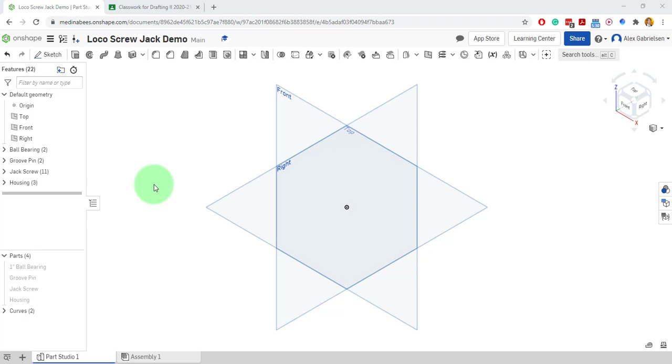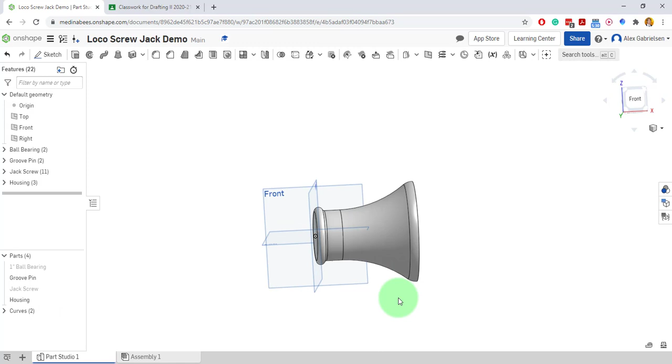Alright, so hopefully you guys are able to complete the ball bearing drawing from an earlier video, the groove pin drawing from an earlier video, and the jack screw,

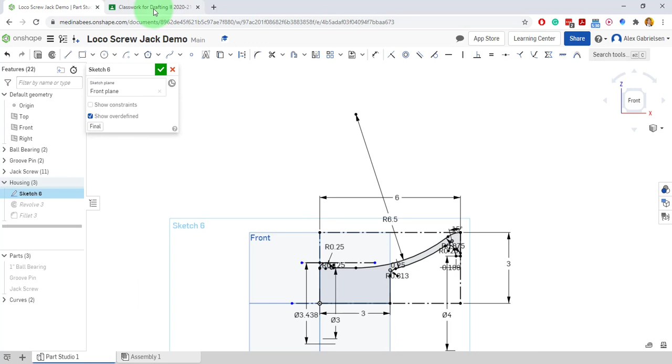and the housing. In this video we are going to continue on with the housing by drawing the handle on the top. So I'm going to go to the steps for the housing, double click the sketch, turn off that groove pin, and view normal to my sketch plane. Now let's take a look at the actual drawing itself.

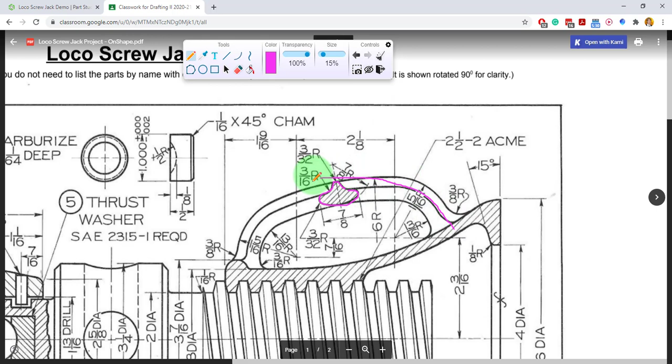In order to draw the handle in 3D, I'm going to have to sweep the profile, or this revolved section, from one side of the handle to the other. This profile needs to follow a path, and the path I want it to follow is the top edge of the handle itself.

I'm not going to worry about the fillets. Those are something that can be done after it's in 3D. I'm not going to worry about this or this either—those are ridges formed by parts of the handle itself. So my first goal is to just get that top ridge, which consists of 3 arcs.

So I'm going to locate those arcs, or the sizes of them. The first one is a 6-inch radius. Then we have a 1 5/16 radius located at this position here, and I'm just going to extend that a little bit. So there is one, my 6-inch is another.

And I have a 1 5/16 on the other side, located by this center point here. My 6-inch radius arc is tangent to the two 1 5/16 radius arcs. So in order to get the 6-inch one, I have to have the 1 5/16 arcs drawn first.

So let's get our framework. Our framework is the center lines, so I can locate the center points for the 2 arcs I need first.

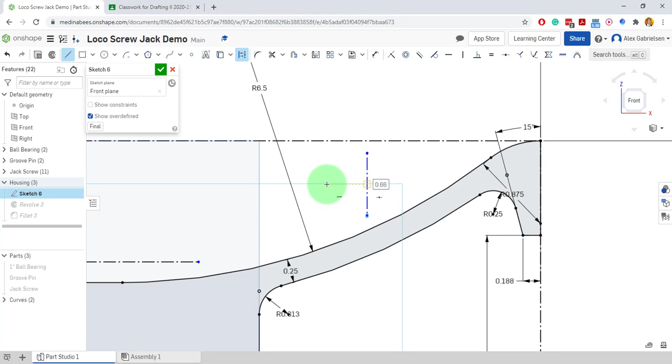It's okay to have it yellow and in line with the center point of this. We'll just have it cross right through the center, and there it is. I'll click the end to stop that. Then we're going to have another one over here. I don't want it to be lined up with anything—I want it free to be constrained later. So I'm making sure I'm not lining up with anything, nothing's yellow and locking me into place.

Okay, so this one shows me that it wants to be 90 degrees with that particular line. That's okay, it can be 90 degrees with that. I'll end this by clicking on the endpoint, line it up with the center there. That's fine, and I'll slide it through.

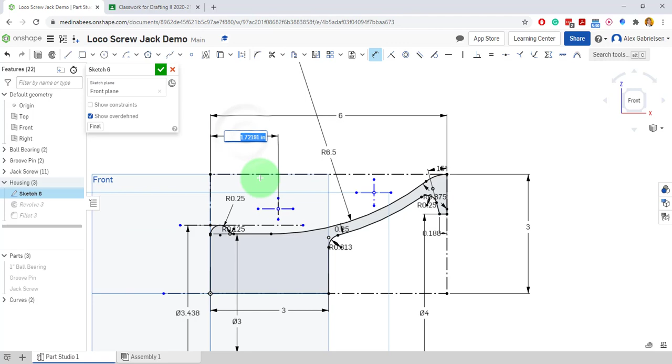So I've got my construction lines. Now I will start to dimension their locations with my dimension tool. So from the top of the housing to this line right here, there's going to be a dimension, and it is 1 9/16. So I'm going to type in 1 9/16. There's the location of it.

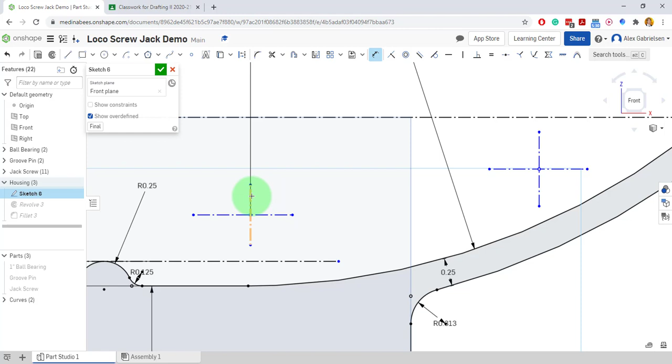The next one is from this vertical line. I'm making sure I'm selecting the line and not just the center point or anything—the line and the line itself. I'll zoom out a little bit and bring this up, and that is supposed to be 2 1/8. So I'm going to type in 2 1/8.

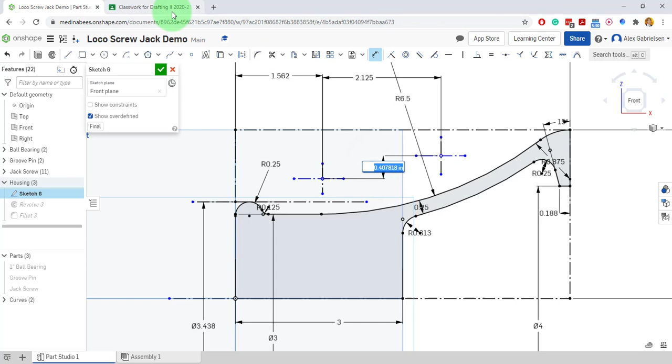And that locates that. Then I need a distance between these two, vertical to vertical distance. And that is supposed to be 7/16. So this one is done. This one is done. I'm going to get my 7/16, so I'll type in 7/16. And that gives me my separation.

And then the last one, I've got the 7/16. The last one is the height of this. So it's 2 3/16. So we'll come back here. We'll do our dimension, and we'll say from here to here is 2 3/16. And it squishes it down.

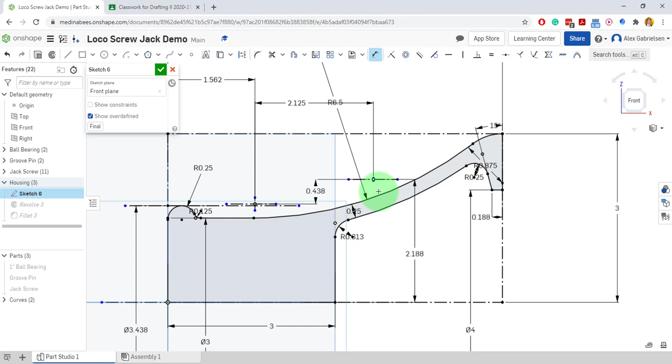And it looks like something weird happened here. We'll just zoom in on it. And my center line, it just got collapsed, it just got crushed. So I'm going to uncheck this dimension, and I'm just going to drag this out and make it a little bit bigger. Go ahead and just drag it out. I'll drag this one out a little bit just for giggles. There it is, so it's easier to see.

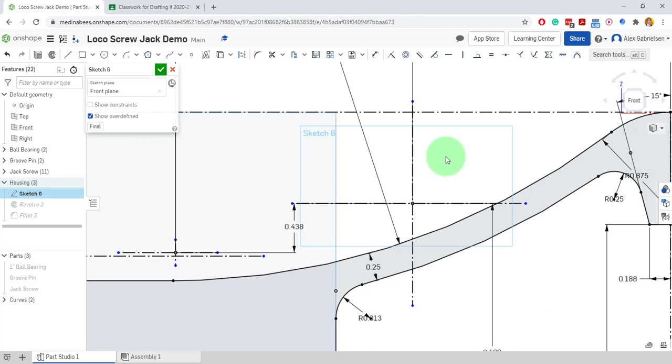I'll do the same thing over here. Just drag this one out. And I'll drag this one out over here. Oops, and that's what I get for dragging and seeing that it's trying to be coincident, trying to be on that line, which it won't be allowed to do. So it's going to yell at me. So I'll just drag it past, and I'll try to make sure that it's not even with anything.

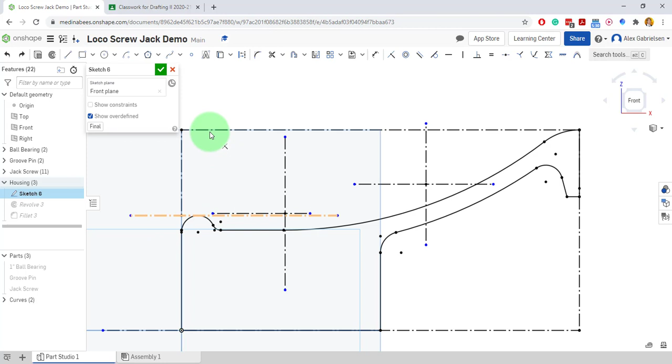Oh, what a pain in the neck! It doesn't like that. Well, we'll just leave it here. I can still see the cross. All right, so those are the center points of my 1 5/16 circles. I've got my measurements down. There's all black. It's all locked in except for the blue endpoints, and that's okay.

So now let's draw some arcs. You know, I'm starting to be a fan of arcs in this program versus the arcs in AutoCAD. The arcs in AutoCAD are kind of a pain. The arcs here in OnShape are kind of handy.

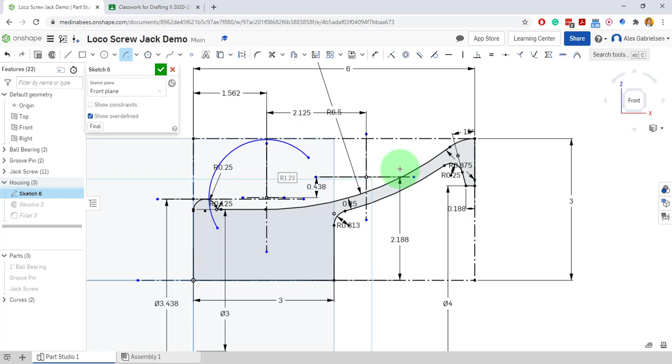So I'm going to choose the center point here where the two lines cross. I want to be on this line and on this line at the same time. There's my center point here. And I am just going to draw way more arc than I need. I'm going to come across and then in, making sure I'm not lined up with anything. Hopefully I'm not lined up with anything. And then I'll come over here and do the same thing, starting maybe inside here, making sure there's nothing. And I'll come across over here. And that looks pretty good.

I'm going to dimension this one, and I'll say that it is 1 5/16. Should be 1 5/16. And I'll make this arc and this arc equal with each other, so they're locked into place.

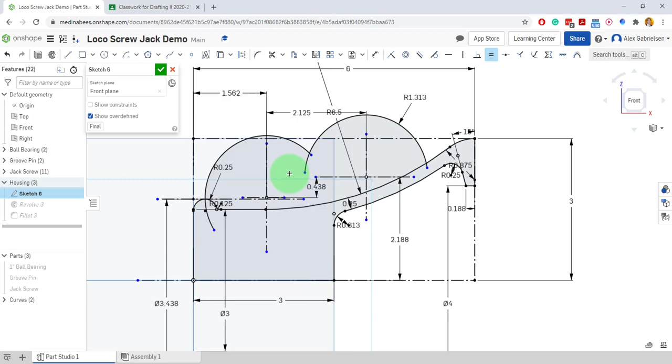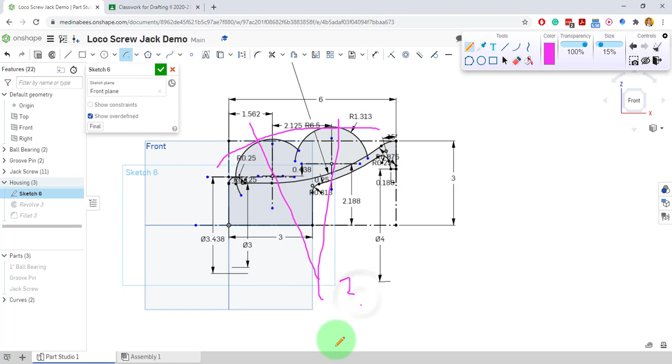Okay, all I have to do now is create my 6-inch arc. I'm going to click the arc command, come down here. I'll just guess, you know, it's going to hit around the top here and the top here, and I'll make kind of like a little triangle. So if I had to guess my arc coming around here of a radius of 6, and I had to guess where the center point would be, I'd guess down here somewhere. So I'm just going to make a guesstimate down here for my center point.

So here I go with my arc. I'll guess right around here somewhere. Make sure I'm not lined up. See that yellow show up? Got to be careful. I can get myself in trouble by constraining it, because if I lock it in, it'll always be in line with that midpoint up there, and I will never be able to move it. I don't want that. I want it to free float out here somewhere. So here, I'll come up, and I'm not going to lock in with anything yellow. I don't want it to line up there. That yellow is dangerous. Come off of that.

Draw myself an arc, make sure I'm not locked, not constraining it at all. Come over here. Now I'll constrain it just by the dimension, and I'll say it needs to be 6. Right now it's almost 7. There it is. Whew, that's crazy, look at that.

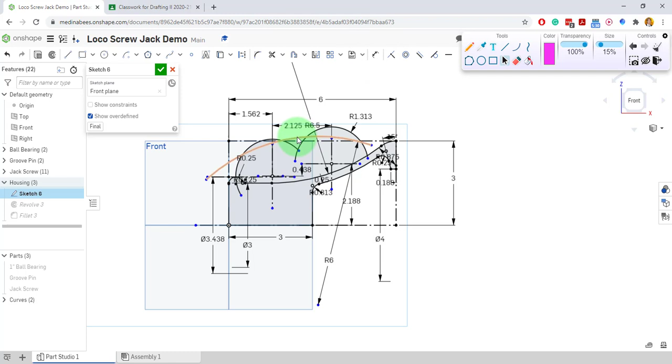So now I'm going to uncheck this, and I'm going to click, and I'm going to drag my center point up a little bit above this, right about there. I can click and drag my center point here if I wanted to, but as long as I'm above it, I can now use my tangent.

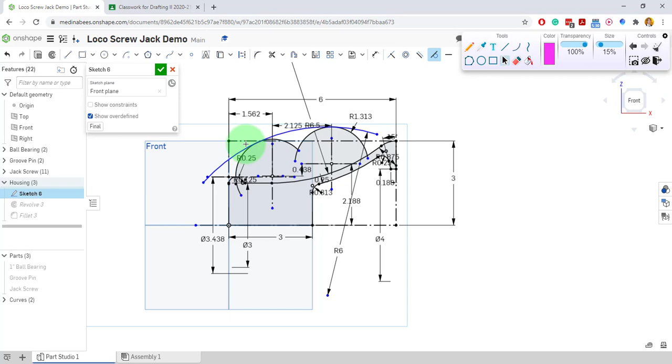I can be tangent or touching this, and even though it looks like it's tangent, I got to make sure. Click here and here, and now it's all black. It's locked into place, and now I can use my scissors to trim this up a little bit because I want a nice smooth path for my sweep.

So I'm going to go through. I can actually drag this back a little bit, drag this back a little bit, whoop, drag this back a little bit, so there's a little less for me to cut. Just drag this because I've got no tool selected at the top. I'm going to leave this, drag it down in here a little bit more, and leave that there. This is important.

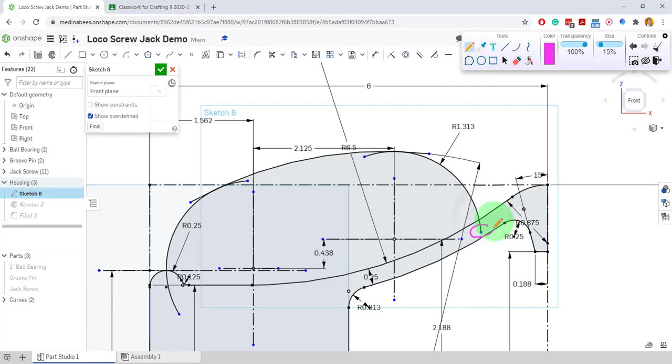I'm leaving this here, and I'm leaving this here, so that when I sweep my profile, it goes down into my object and can be fused with it using Boolean. And then I come down here, it'll go into my object, but not through it. I don't want to do that. So I can sweep and fuse my object, kind of like two droplets of water combining. You're not going to get those apart because they're going to be fused together.

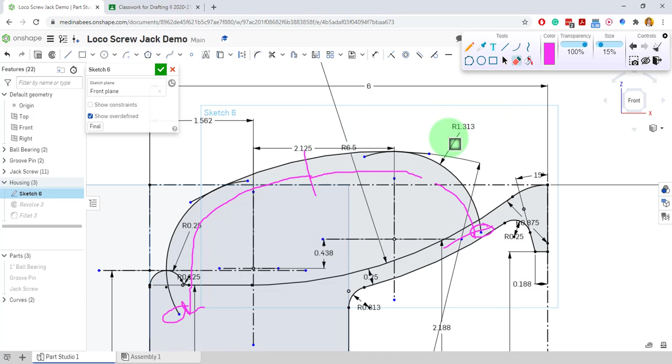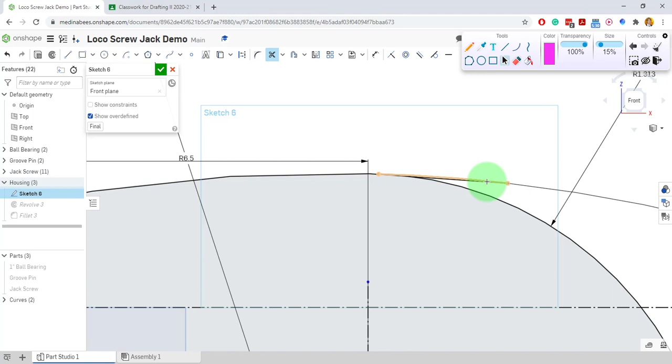So now let's sweep that away, and let's clean it up a little bit more accurately here with the scissors. I'm going to trim this away a little bit, come in, do a little bit more like that, come back, come over here and here, and now I've got a path to sweep. All right, so that is one of the steps.

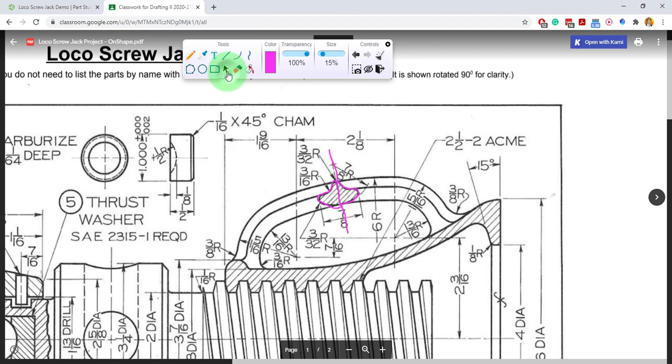Now if I come back over to my drawing and look, you'll notice the profile that I have to make, which is a little bit of a challenge, not too bad, has a center line running through it, and that center line is right in line with the center point of the drawing, or sorry, of the 6-inch radius. I'm going to zoom out a little bit.

So it's the midpoint to the midpoint, and it's lined up normal to the curves. What that means is it's from the middle of this and the middle of this, normal to the curves, looking straight on at it. If I were to bring this down, it would hit the center point of this 6-inch radius. They would be in line with each other, because anytime you have a line or two circles that are concentric, or having the same center point, they'll appear parallel, and if you put a line bisecting them normal to, or at the same midpoints for those arcs, it'll line up and hit that center.

So I'm going to sweep this away. Long story short, I need this line to help guide me. I'm going to put a construction line in there. So let's go back into the drawing.

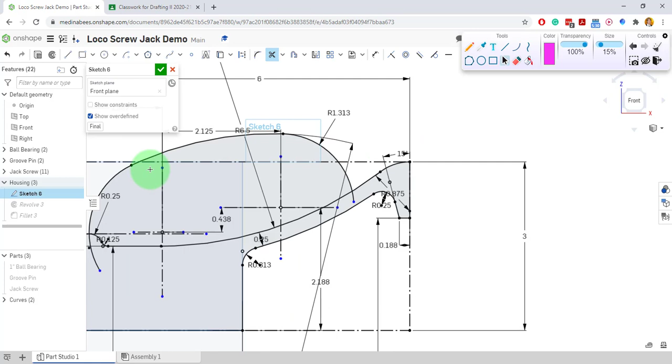And now that it's all cleaned up, no extra lines, I know where my midpoint is, and I can see the center point of my 6-inch radius circle. Here it is. There's my 6-inch radius circle.

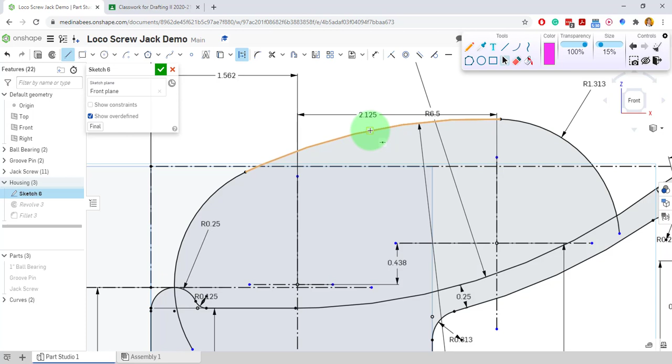There's the center point. And so what I'm going to do is take a line, a construction line, find the midpoint by moving along and looking for a plus, or a box and a line with a dot in the middle — that's the midpoint constraint. So right smack dab in the middle of that arc, I'm going to click, and come down, and make it coincident, or on the same center point. And there it is.

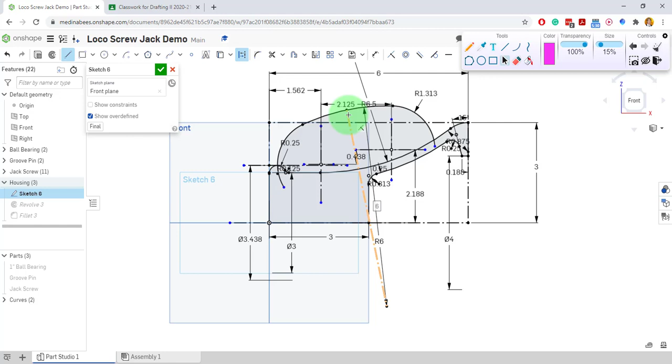And so now that's normal to, or essentially quote unquote 90 degrees with that point of that arc. All right, so my profile curve is going to be drawn on here, but I have to revolve it 90 degrees with the front plane of what I'm drawing on. So I'm going to hit...

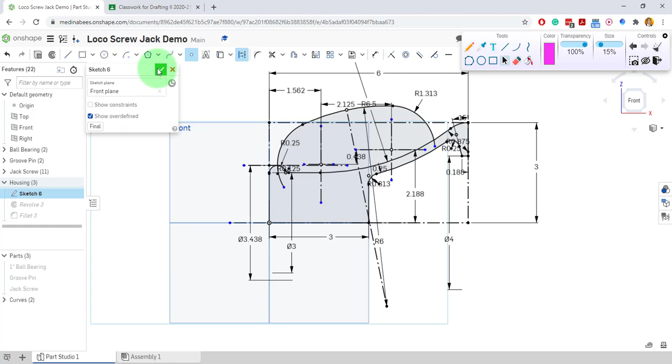I shall do one more thing here just in case — I'll put a point object on the end here. Point objects can be seen pretty much from any view or any one of the construction planes. So I'm just going to stick a point object there just in case I need it. All right, it's not going to hurt anything. I'll click the check mark. There it is, and I will make it visible.

Okay, now what I'm going to do is I want to draw my profile curve on this axis. So I need to make a plane. Ooh, that's a great profile curve. I need to make a plane that is in line with this axis. So let me get rid of that.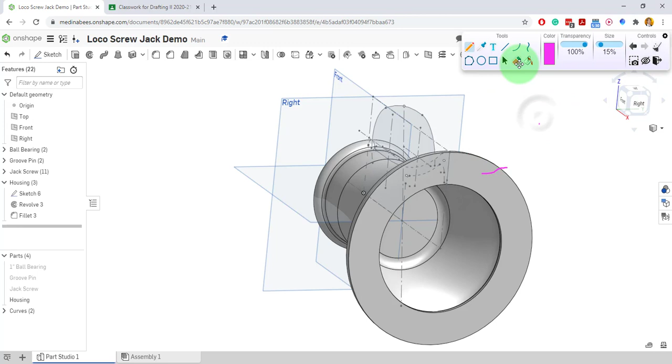I need to make a plane along this line here so I can work on it like a work surface. So my plane is my work surface.

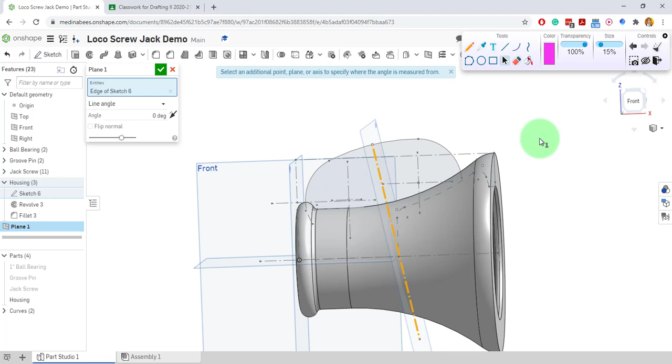I'll come up to plane and select plane point, line angle, point normal, 3-point, mid plane, curve point. Well, I've got a line here, so let's try the one that has the word line in it. Line angle. I'm going to click on this line, and notice already the line kind of is where the plane is, right where I want it to be.

I want it on that spot, so I don't have to change the angle. If I wanted to change the angle, I could there, but I'm not going to. I'm just going to accept that.

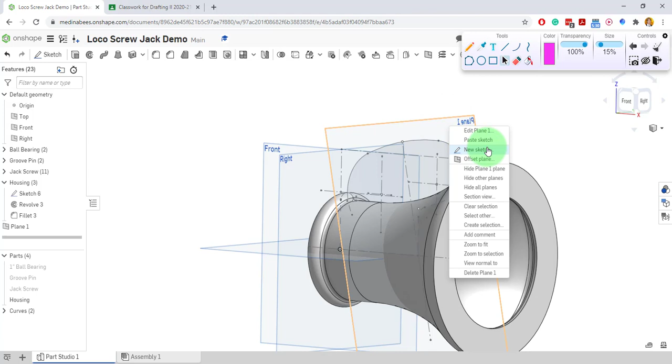So now I'm going to draw my profile on plane 1. I'll right click it and do a new sketch, drawing the new sketch normal to that sketch plane. So I'm looking right in line, and I put that point there, which has like an empty spot. It's not a dark point.

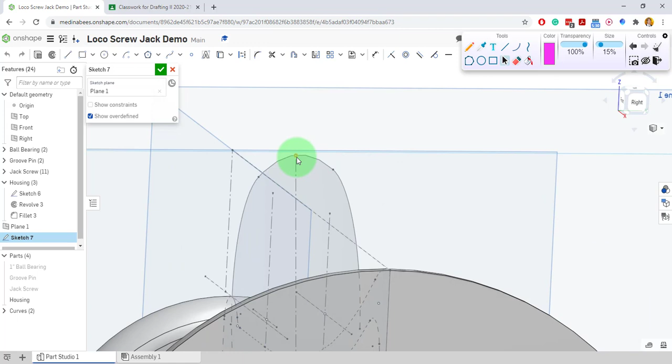I know this is the top of the arc, so actually now I'm kind of glad I put that point object. I can identify it a little bit easier.

Okay, so let me put some boundaries here. Let me draw a line and a construction line, and let's make it even with that. Let's come way out here, ridiculously wide out there, and out here. There it is. And I'll come down, and over, even with this, and I'll just make a rectangle here. Okay, now, way bigger than I need to.

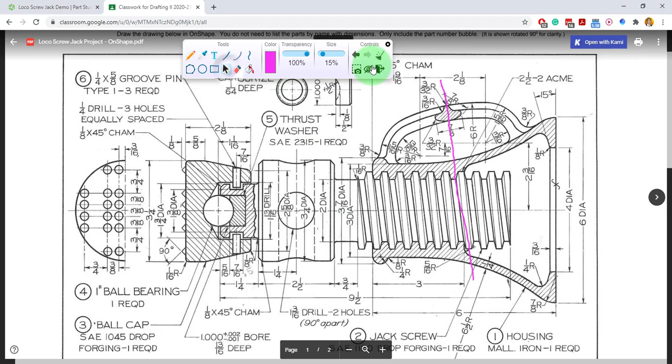Let's check my drawing. I need to make this weird shape, so let's get a closer look at it. Come over to the side here, bring it down.

Okay, so first off, we can't have it be any wider than 7/8. It's going to be 7/8 wide. We can't have it be any taller than whatever this height here is, which is the difference between this radius and this radius, or the difference between 13/16 and 1 5/16, which if we do the math, is a 1/2 inch difference. So it's a 1/2 inch tall, 7/8 wide. I'm going to make my bounds box a 1/2 inch tall, 7/8 wide.

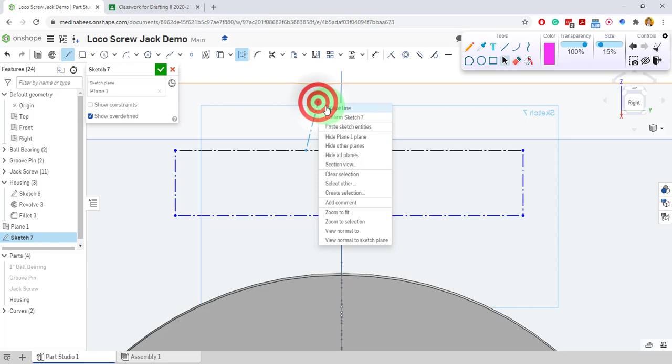So let's take this. Whoops, I got to get out of this command here. Let's right click, escape the line, and click my dimension tool. Let's make this 7/8. Whoa, that's way bigger than 7/8. 7/8 wide, can't be any wider than 7/8. And now I want to make it 1/2 inch tall, so I'll come out here and make it 0.5. So that is where my object is going to fit in.

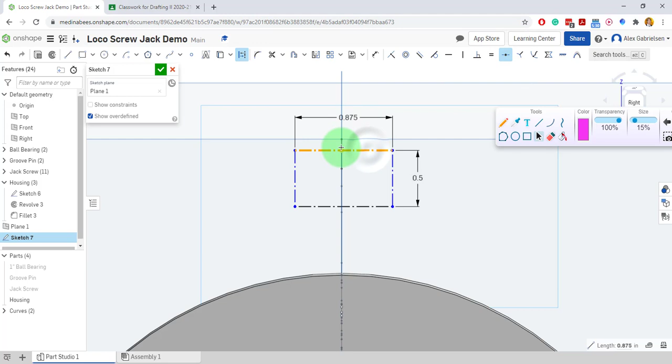Okay, problem is, it looks like this thing's not in the center point. I don't think I made it be the center point of this. I wonder if I can fix that. I wonder if I can say, hey, use the midpoint. Midpoint of this has to be on that dot, and it shifts it over. Now we're good. All right, so it's even on both sides. It's symmetrical, and we can start drawing our profile.

So let's clear this out and take a look. All right, so this has a 7/8 curve, and it touches the bottom, and it's on the middle point. That should be easy enough to do.

Let's do an arc, that the center point lines up with the line that we're on, right? Lines up with the line that we're on. It's in line with all this.

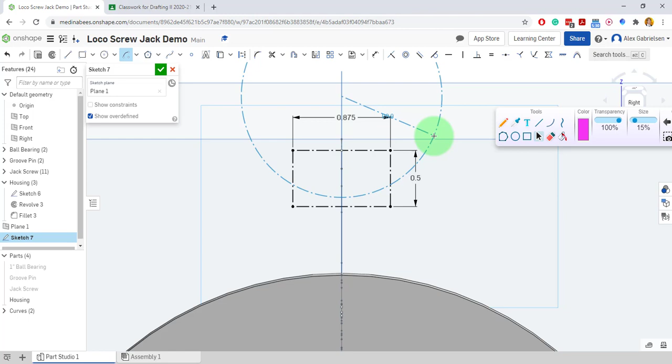Okay, and let's click. And now it comes over here and over here, and it has a radius of 7/8. Not only does it have a radius of 7/8, but it has to be tangent to, or the bottom of it has to be coincident with this point here.

So let's do coincident. It has to go or touch this line there. Whoops. Maybe this point here. Awesome, cool, the center point. Let's undo that. Let's do tangent. We know it has to touch it, so let's go tangent with this line. Cool, all right, and we can take off any tools here.

We can bring this down a little bit, bring this down a little bit if we want. We can even make sure that it's touching those and not outside of that.

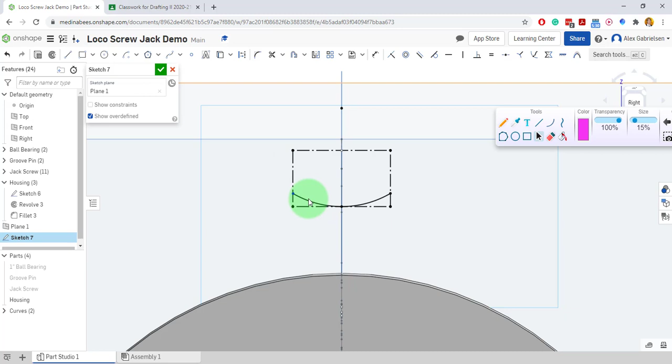Awesome, we've got our 7/8 radius for our weird shape. All right, check, got that bottom one. We know we've got a...

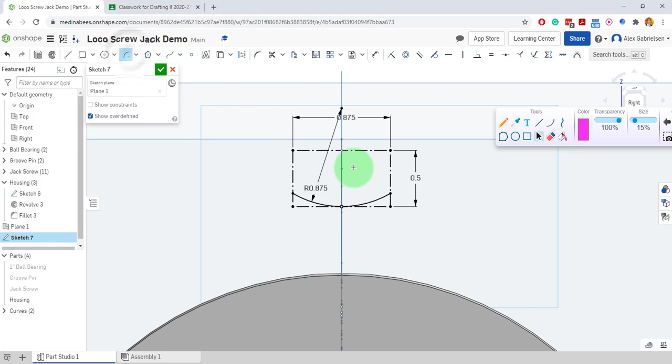3/32 radius arc at the top here. Let's draw that top one. Let's do our boundaries, so let's go to our arc. We know it's got to be on this line here or in line with it. That's fine if it's coincident with this. So our center point's going to be here, and it's going to kind of come down and around.

We know we want it to be tangent with this, and we know we want the size of it to be, I think it was... 3/32. Yep, 3/32.

Awesome, cool. Now check this out. We've got a radius and a radius over here that are also 3/32 and touch the edge and touch the 7/8. So let's put those in.

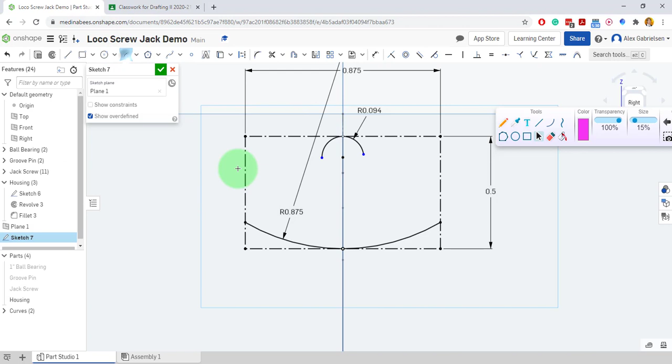All right, we know that we've got an arc that's going to be out here somewhere, and we know it's going to kind of come like this, come around. We know it's going to be tangent to this, we know it's going to be tangent to the bottom, and we know that the size is going to be 3/32 or equal with the top one. There it is, cool. We also know we have the same thing on the other side.

So I think we could probably just mirror this over. Select a mirror line, this vertical line, and the entity is going to be this one. Same thing on the other side. Awesome, okay, uncheck that. Now what else do we have to do?

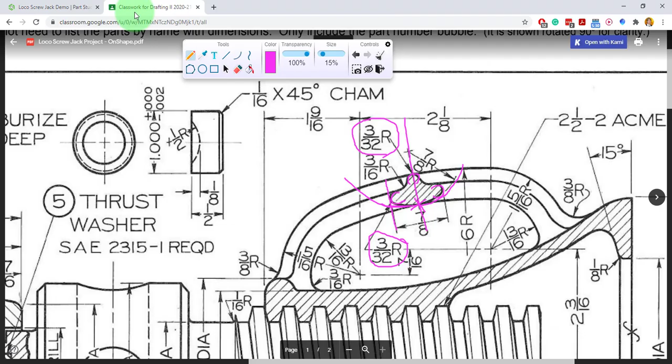Let's come here. Oh, looks like we got another arc that's 3/16. Let's sweep everything away, it's getting a little convoluted. So this touches this arc, it's tangent to, so it's almost like a fillet. Let's do the 3/16.

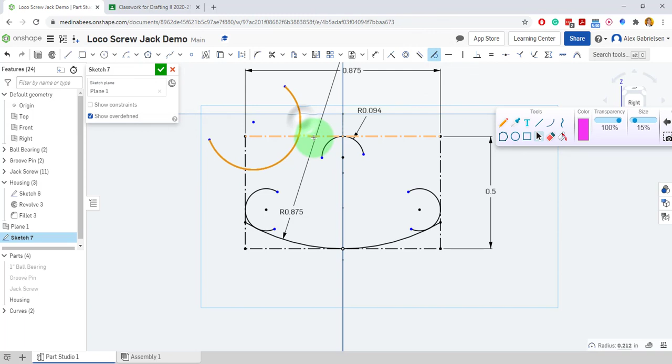Okay, so let's come back over here and let's make an arc. Let's make the center point not touch anything, and let's make it way out here, because it doesn't matter. We're going to constrain it tangent with this one, and we're going to constrain it tangent with this one. We are going to make it have a radius of...

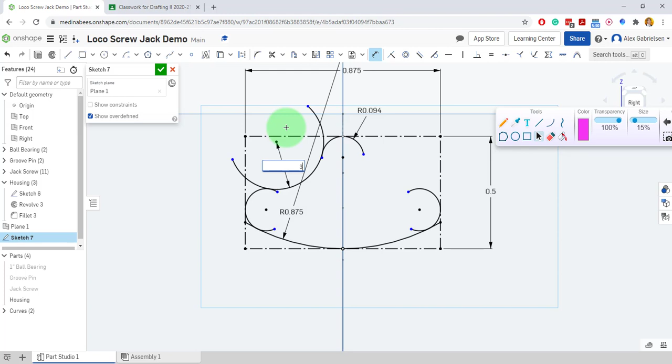3/16. So let's go through and see if it fits. 3/16, there, it looks like it fits in there pretty well. It's following all the rules. Let's zoom in on this, let's bring this down a little bit. Look at that, look at that. Tangent, fits in our bounds.

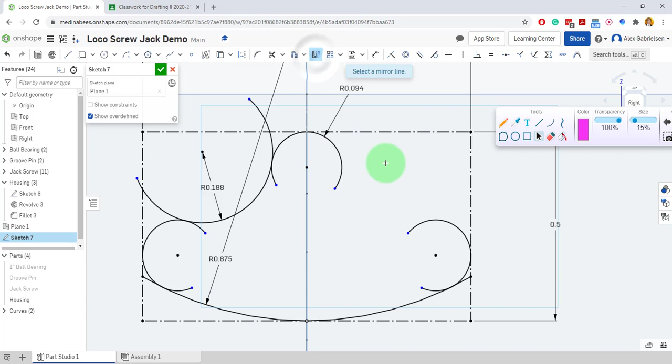All is good. Let's make this one kind of symmetrical, just dragging it over. Let's do a mirror. Here's our mirror line, send this to the other side also. And looky, it encloses the object. And it's all black, so it's all locked into place except for the blue ends.

Let's just clean it up a little bit. We don't really have to. You know what, this may bug some of you, but I'm going to leave it messy like this. The reason for that is because when I go to extrude, or sorry, to sweep it along a path, this gray part is the...

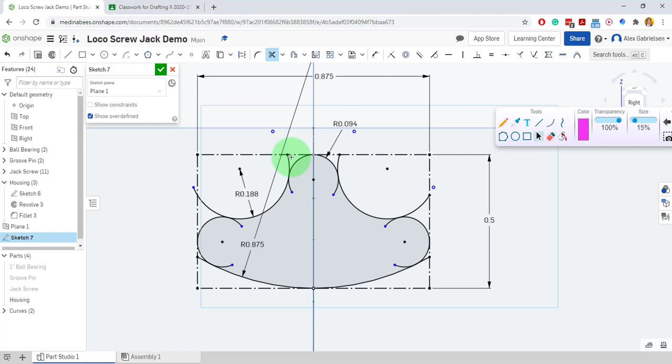only part that's going to get swept, right? Only that stuff is going to be solid. Only that counts as the outline. So let's leave it messy and see what happens.

Let's see if we regret this. Okay, so now that's accepted. It's still a little messy. We'll zoom, or we'll turn, and we'll see, and look, we've got a path to follow. And we've got a profile to follow the path.

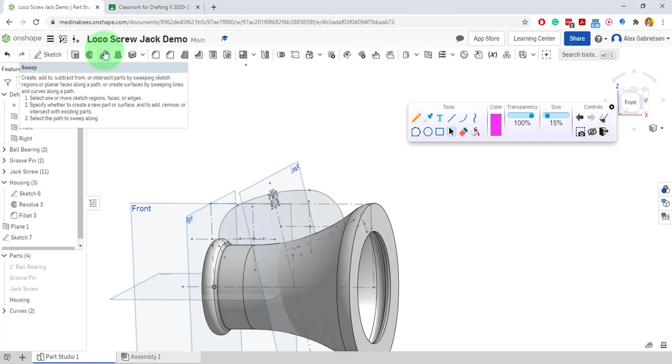And let's see what happens when we try to do this. Let's sweep this away. Let's try our sweep command, not revolve, but sweep. It's following a path, a profile is following a path. So it says faces and sketches and regions to sweep.

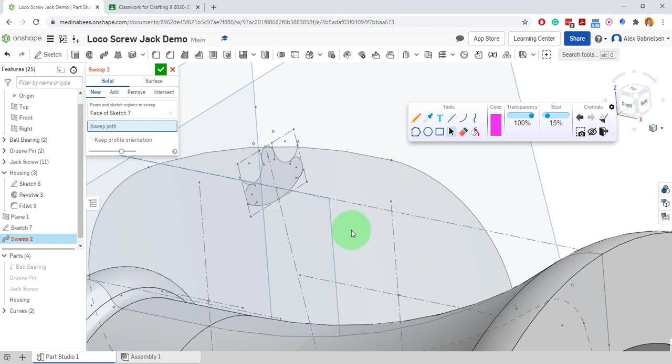We want this face, right? That face right there. And then it says sweep path. I'm going to select sweep path by clicking on it, and let's have it follow this, and this, and this. And we're having it be added to our object.

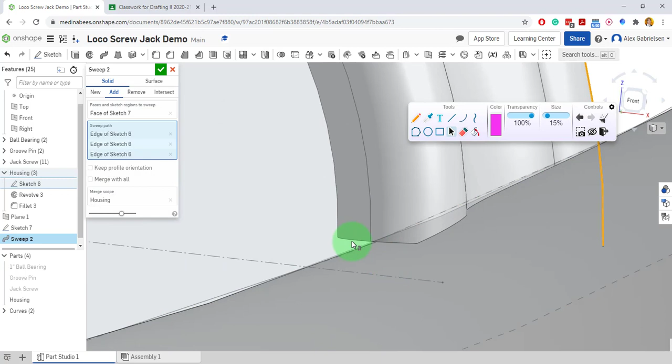Now let's take a look here. It looks like it's a little shy there. We're just going to go ahead and accept it anyway. What I'll do is I'll come back into my sketch and pull this down a little bit to extend this. So we'll go ahead and click this. It looks like there's a little bit of a gap there. We don't want that. I'll come back into sketch 6.

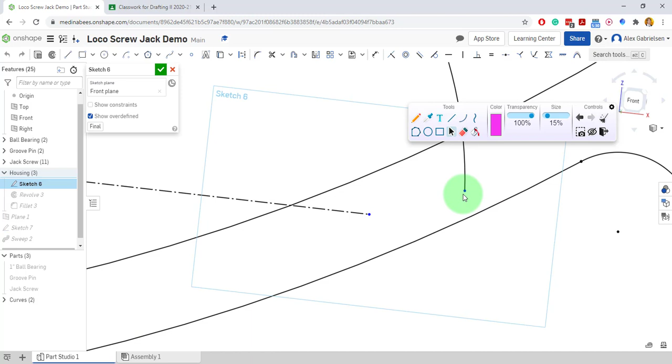We'll pull this down as far as we can without really connecting to the end. There it is. And now we'll accept it, and we'll see if we still got the gap. Oh, looks like it's closed in. Looks like it's sealed up good. All right, we had to get real close, didn't we?

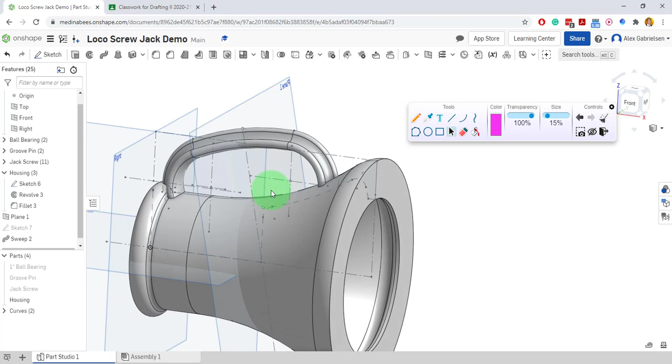So now here is the handle. And to make it official, we're just going to fillet around the base of the handle.

Now this locomotive screw jack drawing was drawn many, many moons ago. So they built this by casting it. They actually carved models out of wood and then put those models into sand, and the sand had a little indent of where the model was. They poured molten iron into it, and it filled it up. So they had a lot of freedom.

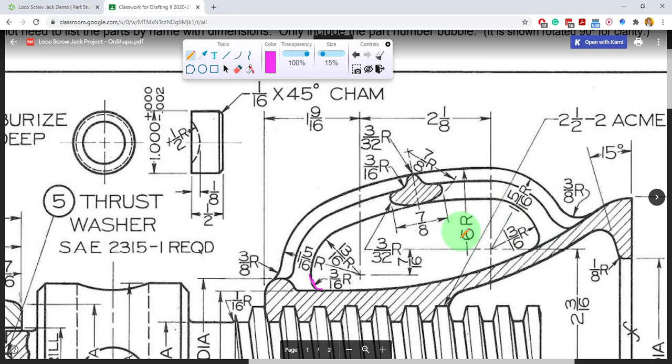Our computer technology, at least this drawing program, has a little bit of a limitation. So we are going to take the 3/16 curve first, the smaller one. It'll handle the smaller radiuses, and we're just going to use 3/16 all the way around. We're going to modify this drawing a little bit.

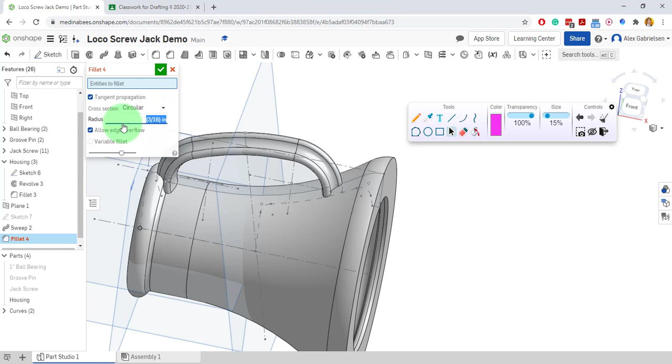So I'm going to come back in, go to my fillet, and say 3/16 for my radius. I'm going to keep all the default settings, zoom in, and try to get the edges all the way around, and I'll inspect it. I click one, and it kind of figures out where they are. Looks good.

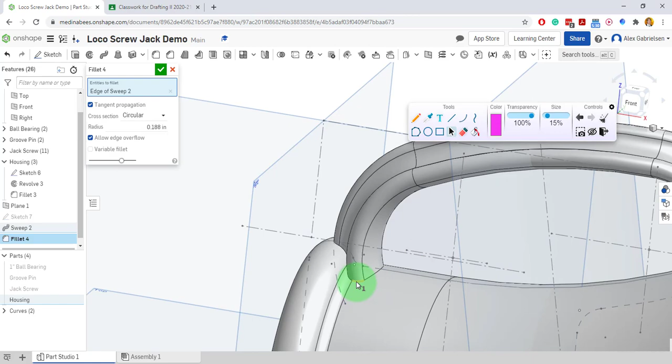And we're just going to keep it simple by using that 3/16. I'm going to click on this. This one's not going to be as nice. Oh, actually, it did a pretty good job of calculating it out. So it's going to put that all the way around, and we're going to accept it. There it is. And so now we have our housing complete.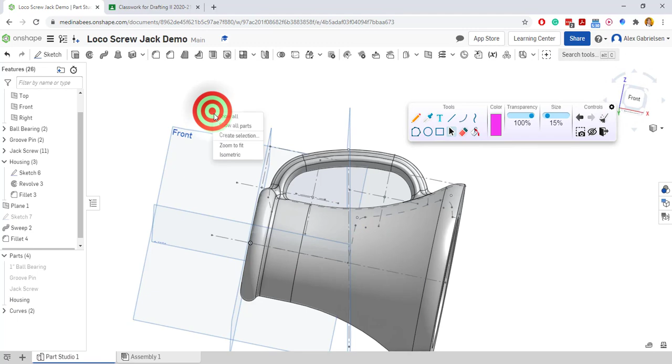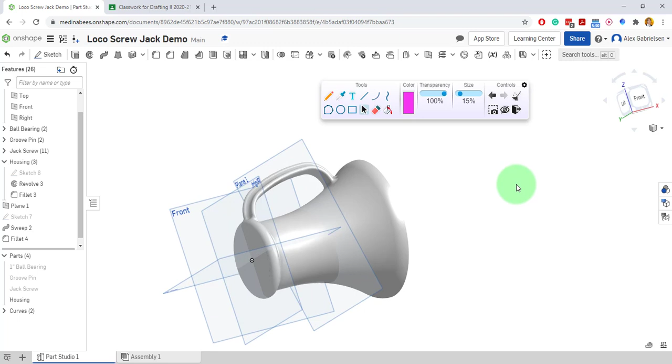There it is. Looks good. I'm going to turn off sketch 6. Pretty nice. I'm going to make it look even fancier. Let's shade it without edges. There we go, no edges on it. Ooh, looks pretty cool. Uh-oh.

It's not complete, is it? What's going on here? We need some internal threads. Oh, no, still not done. Are you kidding me? That's easy to take care of.

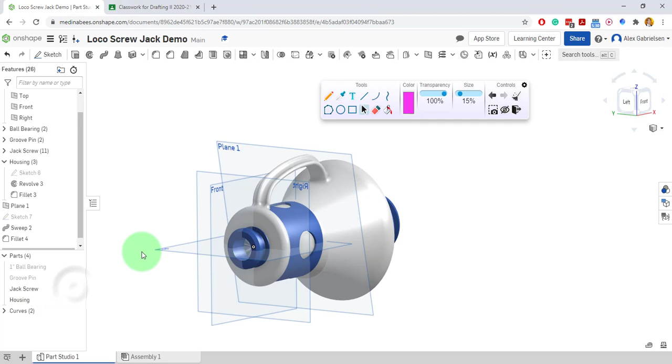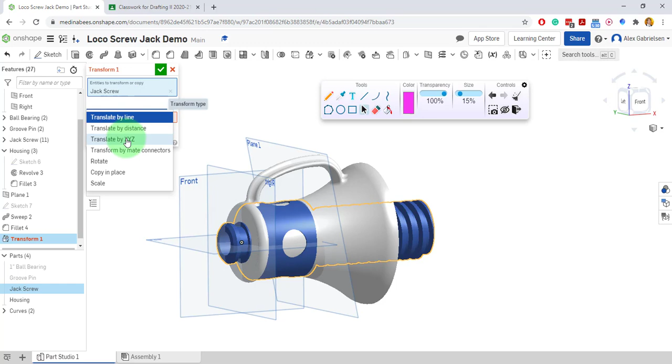Turn on the jack screw from earlier. The jack screw looks like it's part of it. That's crazy. Let's transform. Let's click the object that we want to transform, and let's translate by X, Y, and Z. So we have an X, Y, and Z axis that shows up, those three arrows.

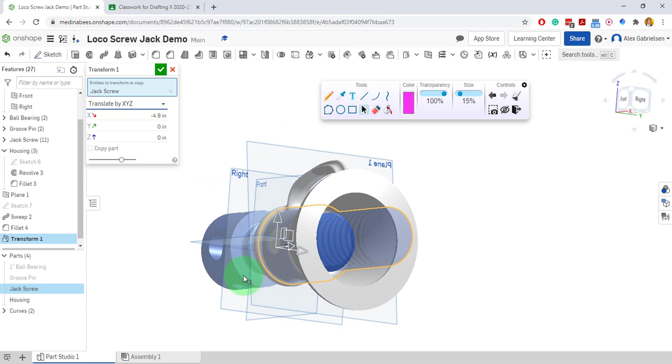Let's slide it on one, slide it back so that there are threads intersecting our object. We can see a little bit of threads out here. I'll go ahead and accept it, and we can see what that does.

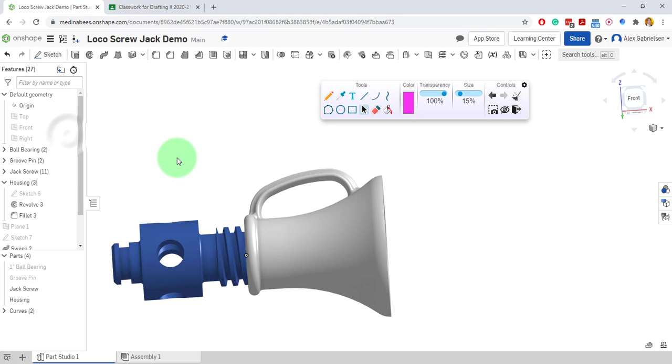There it is. I'm going to turn off my planes so it's a little bit easier to see. So let's turn off plane 1, turn off top, front, right. And so I definitely am going through the top, and I'm definitely sticking out of the bottom.

Now I'm going to use Boolean with these threads to cut into this. So I'll click on the Boolean tool, and I'm going to do a subtraction. I want to subtract from the gray piece. But the tool I want to use, a tool is what cuts. The blue threads cut into the gray piece. My target, what I want to cut, is the housing.

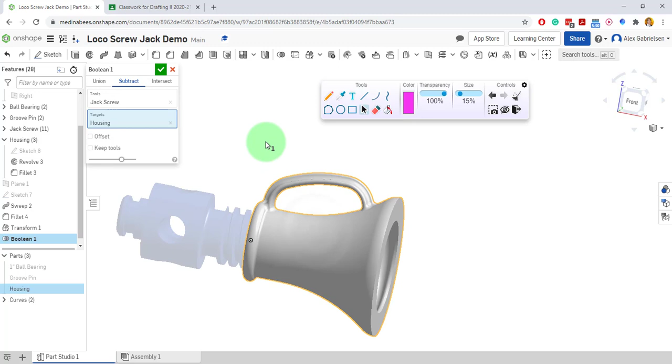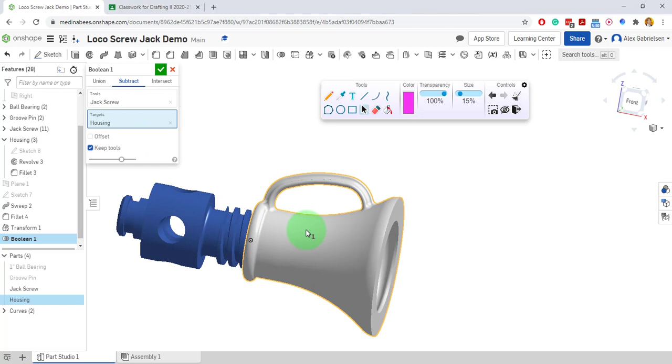But I don't want to, see how this turned almost transparent? I don't want to get rid of it. I don't want it to delete it. So I want to keep the tool. I'm keeping this, and now I hit OK. I'm subtracting. I use the jack screw to cut. The housing is what is going to be cut, and I'm going to keep this after it's all said and done. And I'll hit the check mark.

Oh, look, it did it. How can I tell? Well, let's turn off the jack screw and see what's left behind. And what's left behind are threads cut into the housing.

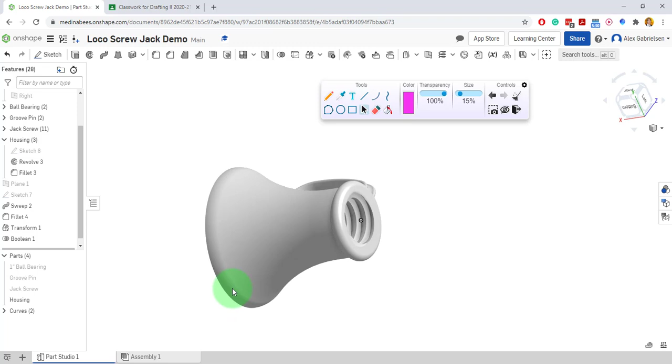Sweet. We got the housing done. We got the jack screw done. We got the groove pin. And we got the ball bearing. The only thing that's left is the ball cap.